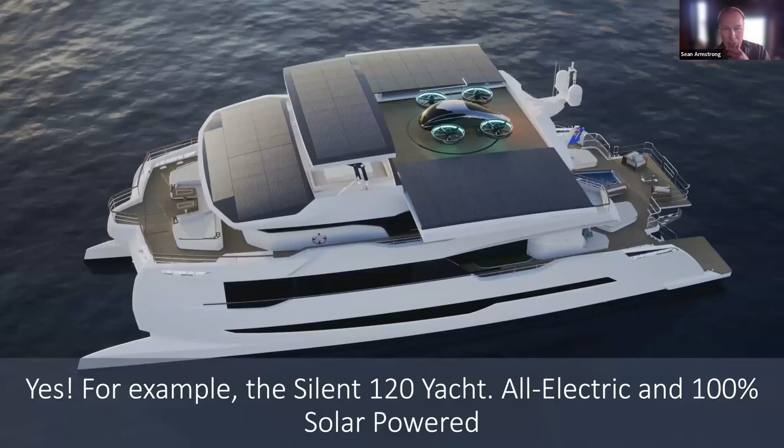PG&E is the number one problem for all of our developments. As he says that, his vice president says that - everyone's like, this is totally real. And so my response is like, yeah, we totally can.

This has been going on for quite a while - not only that house I had, the funky house on campus, but for quite a while they've been floating around in these off-grid boats. It's also houseboats like in Europe, the Netherlands, in the canals and such.

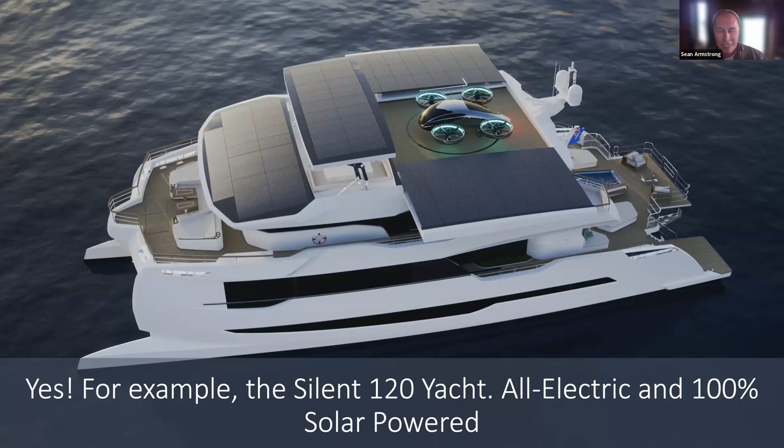So this is a 120-foot long yacht. It's got the outdoor hot tub and movie screens. It comes with jet skis, comes with a submarine. That little airplane you saw there, that's just photoshopped in, but they say next year they're going to have an artificial intelligence, super awesome little self-flying small airplane for flying into Santa Monica.

Then we also know that over in Utrecht, Netherlands, they've been taking this seriously. They banned gas in new construction in 2016, long before anyone in the United States did that - Berkeley was the first one, in 2019.

They have been going at this with how do we get all of our wind power that's coming in at different times of the day, and our solar, how do we balance that? And they said, okay, we have to put in 14,000 vehicle-to-building, vehicle-to-grid chargers in our city. They have 1,000 of them now.

These are bi-directional, so electricity can come out of the car. You can charge your car during the day with these special rates, go to these chargers - you've got 1,000 in, 14,000 to go. It's a city of like 150,000 people. So you see the ratio: 1,000 bidirectional chargers for every 10,000 residents.

So these batteries are huge. Batteries in the United States right now - there's 80 times more batteries on wheels than there are attached to people's homes, like Powerwalls and LG Chem. 80 times more. And there's 4 to 5 times more batteries on wheels than there are grid-supporting batteries, those big fields of batteries next to whatever.

So the batteries in vehicles are the batteries of the United States. You can add all the other batteries in there and you haven't got half as much battery as there is on wheels right now. And that's true throughout the world.

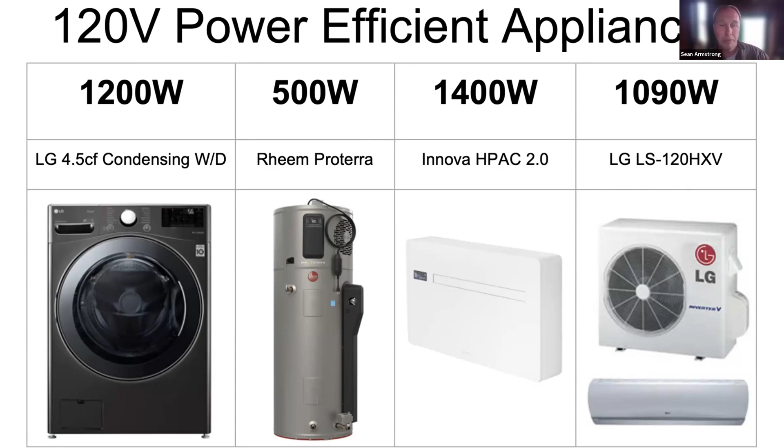That's not for your home retrofit, but you should just know this. Mitrex, a company out of Canada, they've been making siding forever, and now they're making solar panel siding. Great stuff, it's all UL listed, fire rated, everything about it's done.

Batteries, hot topic. I mentioned earlier how much more battery there is on wheels than there is on buildings - it's an 80-to-1 ratio. Well, it shows up in pricing. If you're going to get 7.5 Tesla Powerwalls, that price of $130,000 installed - keep in mind it's maybe $70,000 to $80,000 of battery you purchased, but you have to install it, and it's expensive to install these things, versus factory installed batteries on wheels.

And so this Ford F-150 Lightning, it comes automatically with a 7.2, which is what an electric resistance dryer uses - 30 amps at 240 volts. It comes with a lot of power. It comes with a 240 volt generator that you can essentially plug into your house now, in PG&E territory. They've approved it - there's a little collar for it, but you can plug it in. There's a lot of products that would manage this, not just PG&E's little collar.

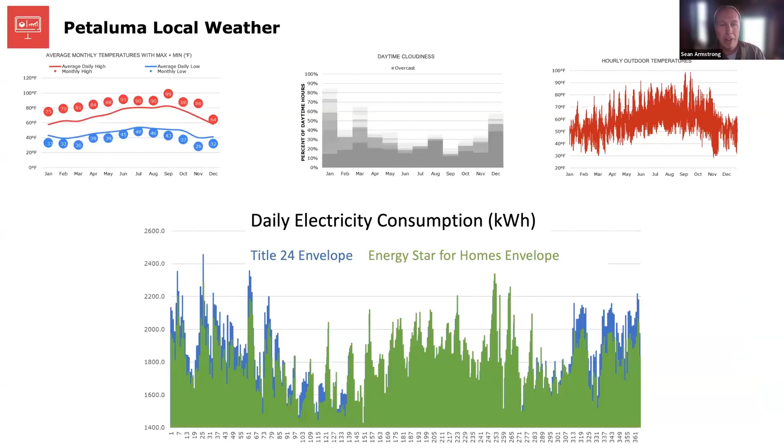So how this is going to work out, how this is working out globally as a phenomenon - not just in California, not just on the East Coast or in Europe - is that people, in this case tenants, with vehicle to building or vehicle to grid electric vehicles, will be offered free charging or low-cost charging - in our case free charging during daylight hours when the project's solar panels are producing more than the system can handle, it might otherwise just go into the dirt if we couldn't put it into vehicles. In return, for small amounts of power leading up to and during prolonged bad weather, we'll charge our big battery in the project off these little batteries - a little bit from each vehicle, maybe 15 miles of driving worth. That's what I mean by a little bit, like taking a little drive to the grocery store.

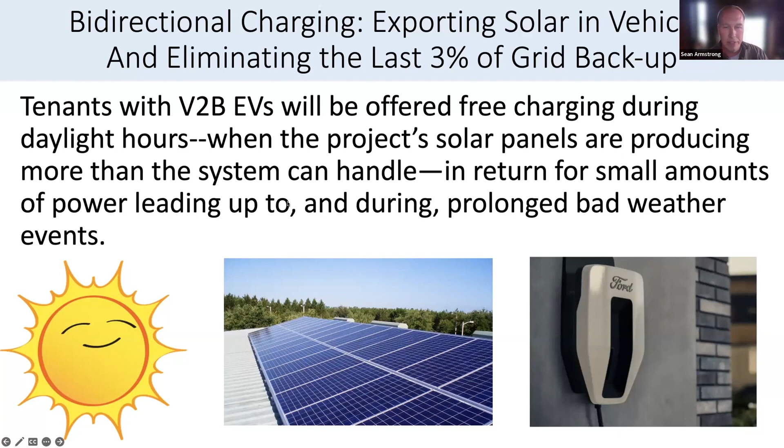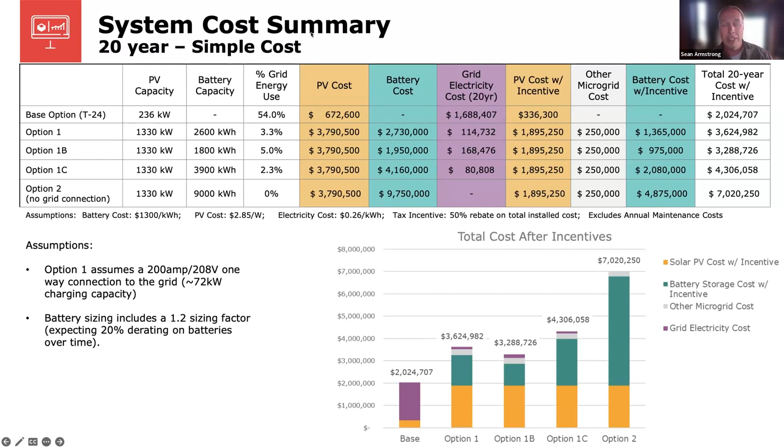The last slide here shows you our strategies. There's the base strategy of just a little bit of solar and then a bunch of purple grid electricity. Then we have three different options where we're getting about 2 to 5% of our electricity from the grid or from vehicles - that's our either-or option. Maybe we get 5% of all the electricity we need in the year, almost all of it just in the wintertime, from vehicles contributing in. And this is not futuristic - as I said, this is already happening everywhere. It's been happening since 2011, since the Fukushima earthquakes, that disaster over in Japan.

So that's the end of that presentation. If anyone has any questions just about that for a moment - that's sort of the neatest, most advanced thing I'm doing to try to show how to get around having to hook up with PG&E, which delays our construction so much that affordable housing projects can't get built now. Literally in Petaluma, they were denied building permits because PG&E just couldn't handle the problem of trying to get these things hooked up.

Now Tim, you ask: can I convert an oil burning boiler, hot water baseboard heating system to an electric system utilizing the latest heat pumps?

To baseboard heating system is your question - okay, yes you can, but can we replace your baseboard heaters with something efficient, please? So I'm going to share my screen here just for kicks, I wanted to show you that. I'm going to quickly show you an answer to one of the questions, then we'll go back into the case studies, the next part where I keep talking. Jaga - they make heat pump friendly baseboard heaters, they're called efficient convectors. So I'm going to click on the efficient convectors.

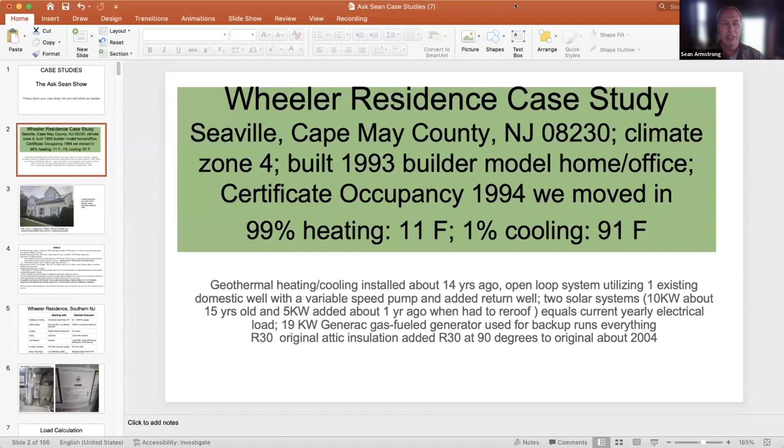All right, let's talk about the Wheeler house. It's in Seaville, Cape May County, New Jersey, climate zone 4. It's a 1993 house, we just moved in. That's nice, so 1% cooling. Now they have a geothermal heat pump that went in about 14 years ago. They've got solar electric, great, so it's making their electricity very low cost.

So if they're electrifying additional things, terrific, low cost electricity. Now they've got a 19 kW Generac gas fuel generator used for backup that runs everything.

Now, let us recall the presentation I just gave you, which is grant funded, tons of us researchers—this is a Noah's Ark of researchers. We're all working on the question together. I just gave you what I think is the most energy efficient, resilient, low cost battery way of doing things.

So when I look at this 19 kW Generac gas fueled generator, I said, well, the Ford F-150 Lightning runs 19.2 kW through its inverter. So you could have a Ford, which has 7.5 Tesla Powerwalls in it, and that would also be half as expensive as installing those Tesla Powerwalls. That was like $63,000 or $67,000.

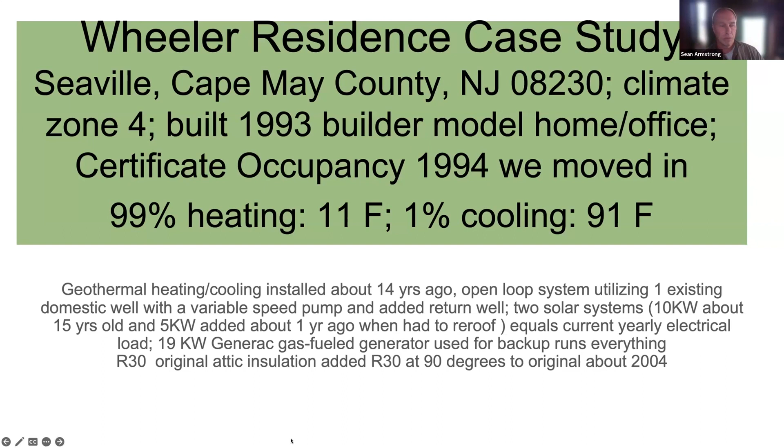So here's the house, that's a nice house. It's got solar panels on the roof, and we know it's got a ground source heat pump. So we talked before about how the F-150 Lightning—now it has a gas water heater in the basement.

Now, the water heater that I showed you, that 500-watt water heater, that generally is what I would recommend. But because the basement could get too cold, getting one of those same heat pump water heaters that has some electric resistance backup, that'd probably be good.

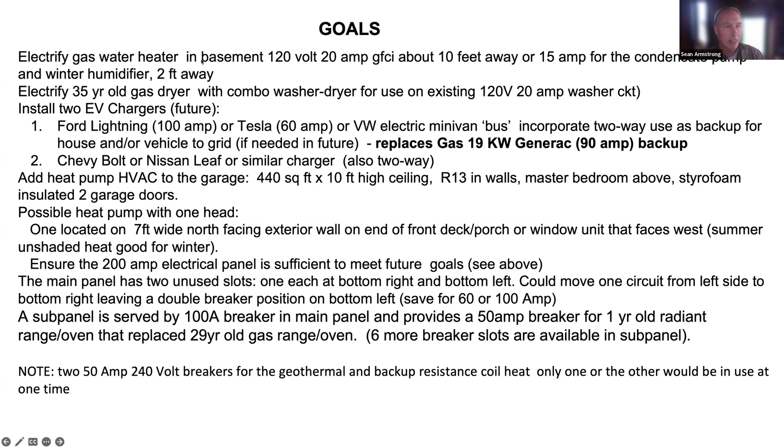Let me show everybody just for a moment—I'm going to back out of this slide. So let's talk about water heaters for just a second. There's a resource that I'm going to get, because this is all going by pretty fast, I know. And I'm going to just walk you through the resource instead of blowing your mind so quickly.

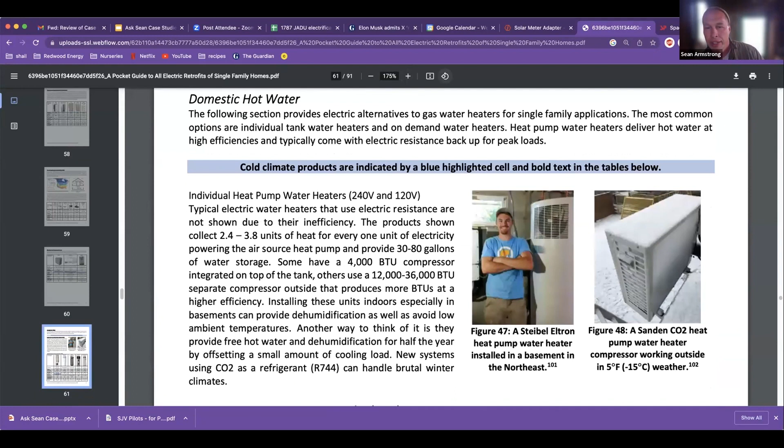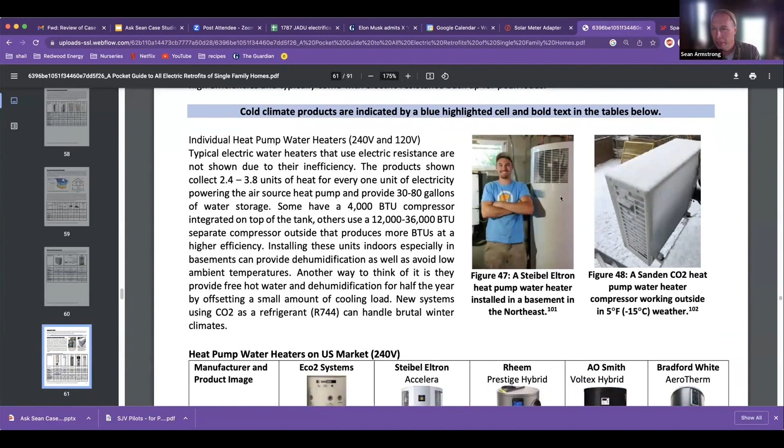If you just hit domestic hot water, it brings you to the domestic hot water heat pump page, and it's showing, like, if you have an outside situation, you can use the Sanden CO2. If you have an inside situation, if it's still warm enough in the winter, you can run just a heat pump inside. And here's these products.

That's what's nice about this booklet. It's like, oh, Stiebel Eltron, that's made in Vermont. It's the highest end of all of them, and it's been going since 1985. They've been making them the longest in our country. But you pay a premium of like $1,000.

Rheem, kind of the cheapest. They're a little bit louder at 55 decibels. A.O. Smith, they're offering a 45 decibel product. So the way you experience that is it's half as loud.

The way it comes out in cost is that the Rheem, if you're going to put it in your closet, in the house, which is a great place to put a heat pump water heater, you need to have it on an anti-vibration pad, and put insulation inside that closet and a vented door, perhaps. It's got a little louver on the top and a little quarter-inch cut underneath so it can get some air moving through it. But you need to acoustically isolate it versus the A.O. Smith, the much quieter one. You don't have to do so much work, you don't have to worry about that.

And Bradford White, which is essentially more like the Rheem, it's sort of like lower cost and has a little bit less invested in its quietness.

Oh, and the last one to think about is, what if you're the kind of person who has a gigantic rain shower? That's fine, those water heaters can all handle like the 2.5, 3.5 gallon per minute rain showers, the huge waterfall experience.

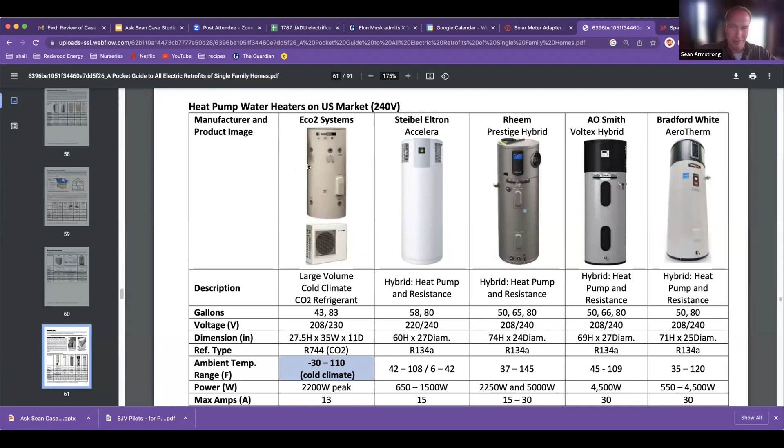But it also has a better refrigerant. These refrigerants all boil at around -35 Fahrenheit. This one boils at -110, pardon me, so it can absorb way more heat even on a super cold day. At -30, no worries. So this one also produces 4 times as much hot water, and it does it at crazy low temperatures.

So these are kind of your options, basically, in the United States. The brands every year come up with a new long number and symbol, but that's what you got.

And all these ones can go inside, and if they're inside in a warm place, you don't need electric resistance backup at all. You can use that one I was showing you, the 500 watts, 120 volt, plugs in anywhere, easy peasy.

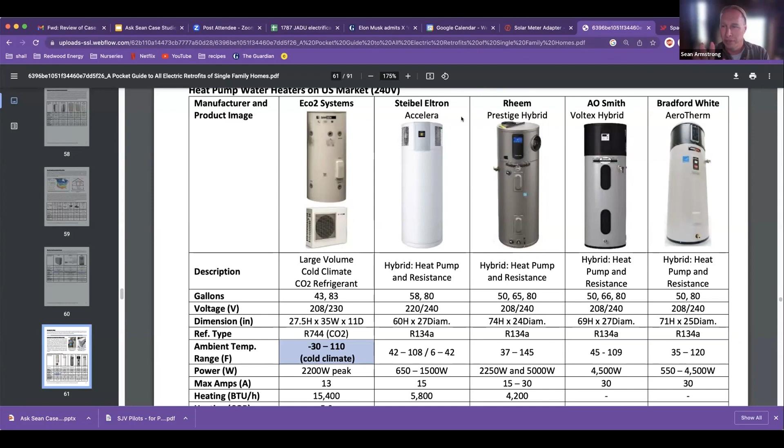But if you're putting it into a basement, you might want to have an electric resistance element backup, which turns it into 240 volts. In an unconditioned basement, like ones that already kind of freeze, if it's close to 40 degrees Fahrenheit and it's only the water heater keeping the basement warm, this is going to be a water heater that keeps the basement cold and dries it out so it doesn't have as much mildew and wetness. It's a dehumidifier also.

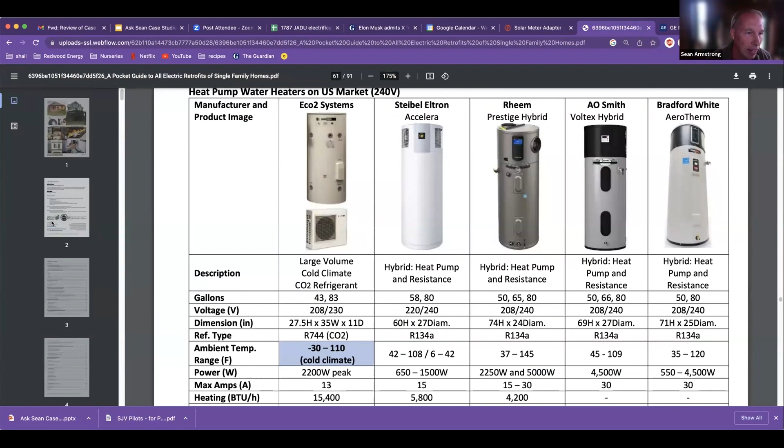Now, going back to the guide, I'm just going to show you that. Let's see here.

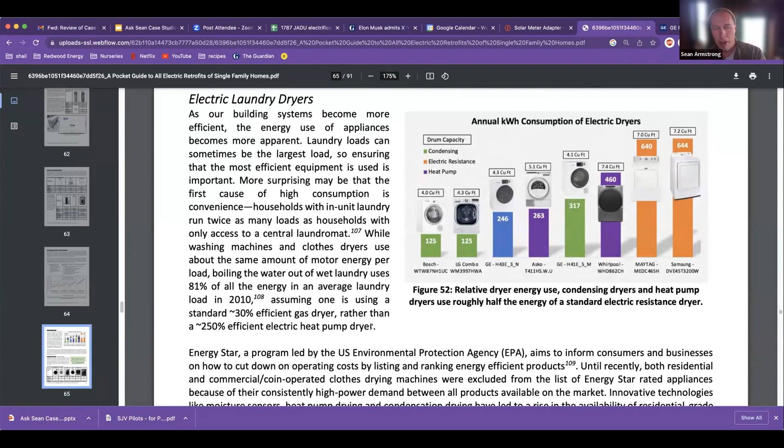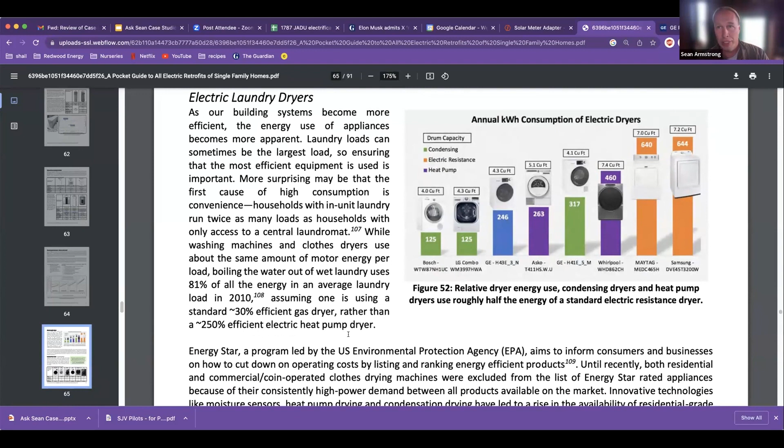Laundry dryers. Okay, I was showing you before how electric resistance, here in orange, uses a lot more energy. Now you can see there's heat pumps in the middle. There's even condensing washer dryers and heat pumps at the very bottom, but the very lowest consuming are small loads. That's the trick—if you can get a washing and drying machine that has a smaller amount of air that it heats up, that is the most efficient, just so you know.

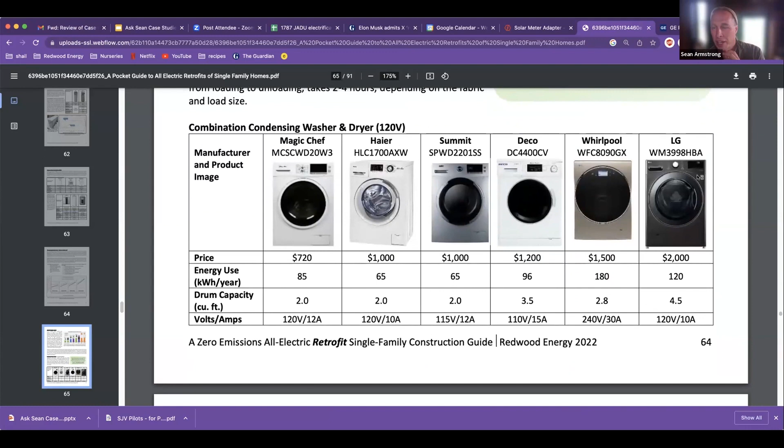There's a lot of energy that's wasted in big loads. These are combination condensing washer dryers out there. LG has the best, and it's the one that I have currently. I'd like to get that GE I just showed you. Here are single purpose heat pump dryers that use half to one-third as much.

They come in different capacities. Just note that Kenmore and Whirlpool have the 7.4 cubic capacity, so those are going to use more energy because they have more capacity. But if you're a person who launders dog bedding or something, then maybe you need a big one.

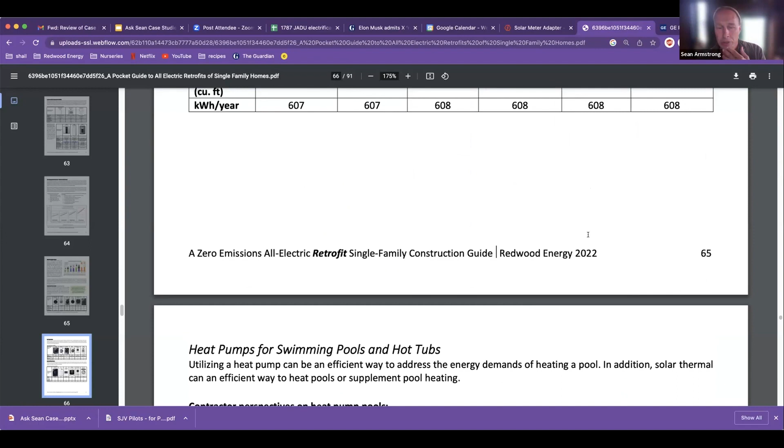And then there are standard electric resistance dryers that are 240 volt, you guys all know about those. And there are a few that are 120 volt that just are not efficient and take a long time, but some people just need that because they're cheap. They're like $300, $400 dryers, $600 for a really big one.

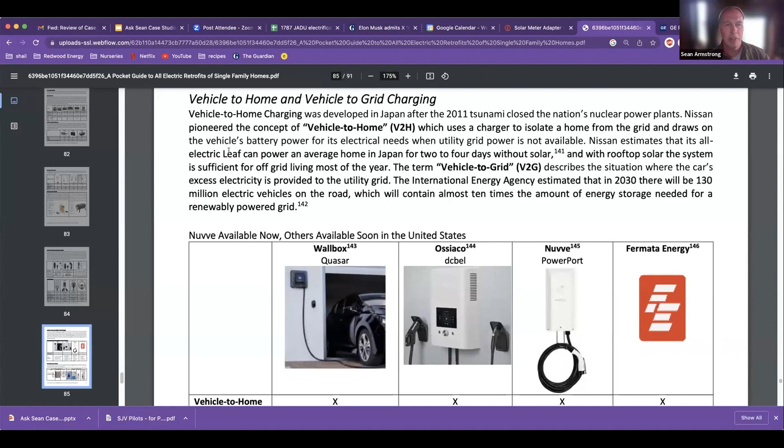Here we go, stop share, new share. And so here in the booklet, it gives you a conversation about vehicle to home and vehicle to grid charging. So these are neat - Wallbox, Ossiaco, which has the dcbel. They're all into music, so Ossiaco is a musical term. Decibel, obviously, they have other things. If you go to their website, they're just really into music.

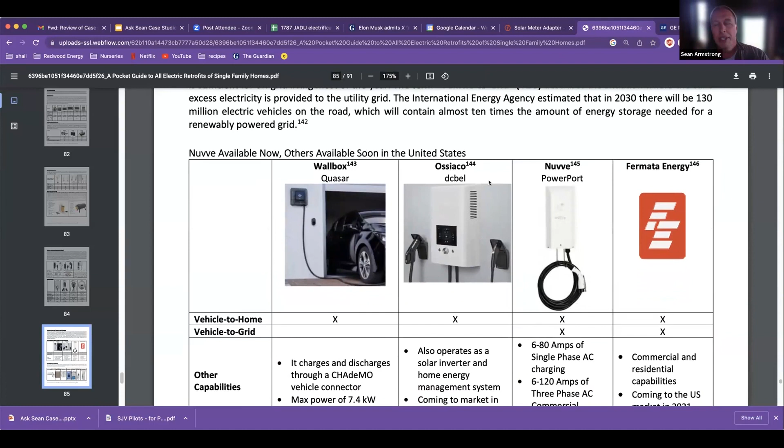Nuvve is doing this right now - Nuvve is partnered with Wallbox for the home version, and Nuvve has in the United States ones for school buses, because they're turning schools into resiliency hubs. So the school buses can power the school during a blizzard, power the school post-earthquake, post-tornado, post-wildfire, name your disaster. Fermata is all over Eurasia and keeps teasing us saying they're going to bring something to the United States. But Wallbox, Ossiaco, and Nuvve are here.

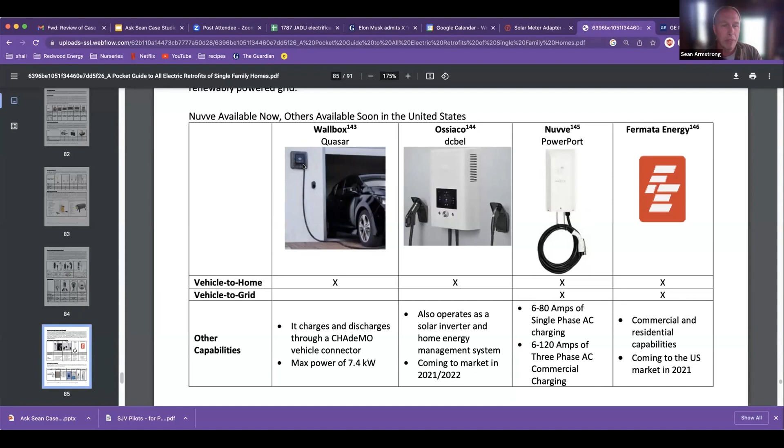And Enphase, which is our nation's largest solar inverter manufacturer, they are making one that coordinates with their specific Enphase microinverters - the small ones that go on the back of the panels, which are essentially the dominant way that inverting solar panels is done in the United States. Not the only way, but they're coming out with one as well. Now, these are ones on the other side of the oceans, just so you know.

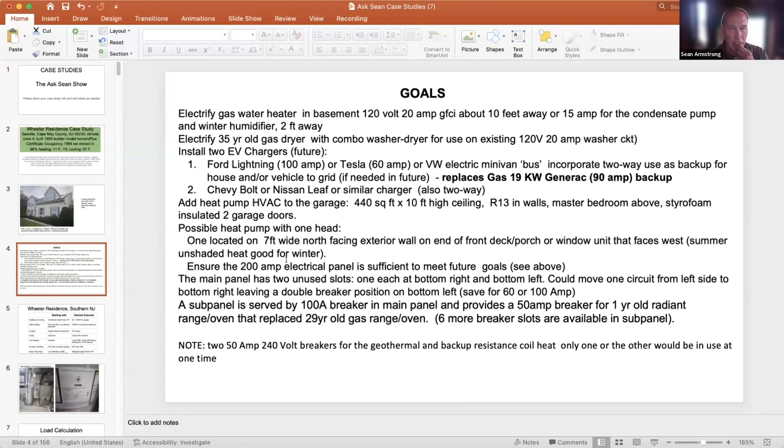Okay, so now back to our question. Oh, this is nicely organized here. We'll just work on this going forward.

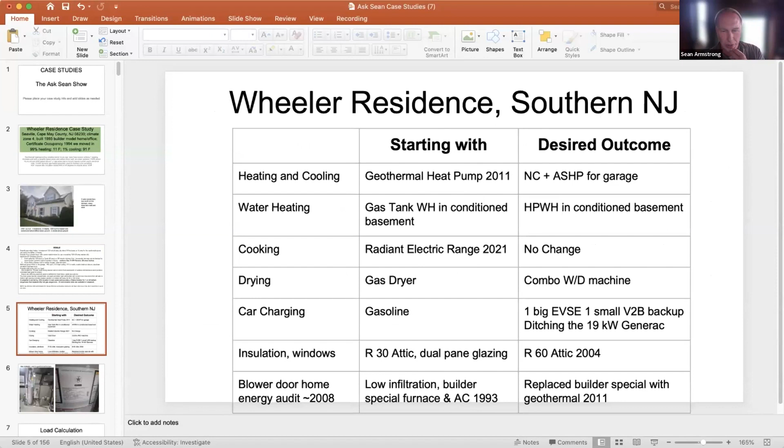So the heating and cooling, desired outcome, and an air source heat pump for the garage. What does NC stand for? Tom, did you take down that notation? Yep, so that was no change - just leave the geothermal as it is. So you couldn't just write out no change, huh? You had to make a new abbreviation. Yep, okay.

So, and plus the air source heat pump for the garage, can you weigh in on that one? Are you talking about adding a new air source heat pump? Is that what I was understanding there? Yes. Okay, so air source heat pump for the garage.

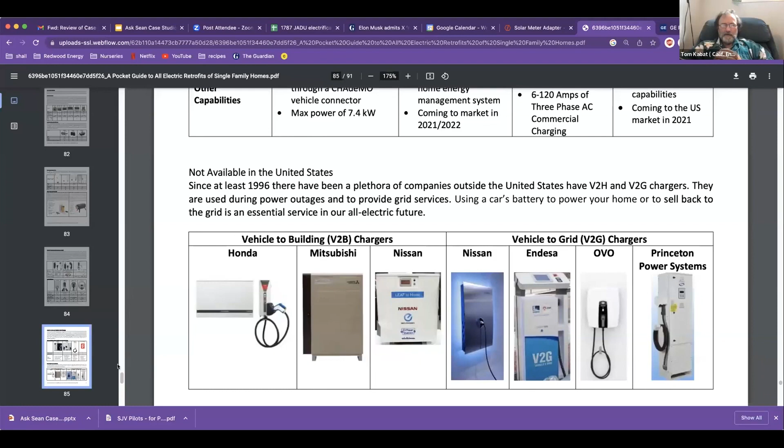Let's go stop share, new share, going back to the little booklet. And so in the case studies, the two case studies we're looking at tonight, they both have 200 amp electric panels. Oh, so we don't have to worry that much. Right, and they're both very interested in ground source heat pumps. One already has one in, the other client owns a backhoe and is ready to dig, to put his own in, and he's also an HVAC contractor and electrical contractor. So we've got some kind of unique guests on the show tonight.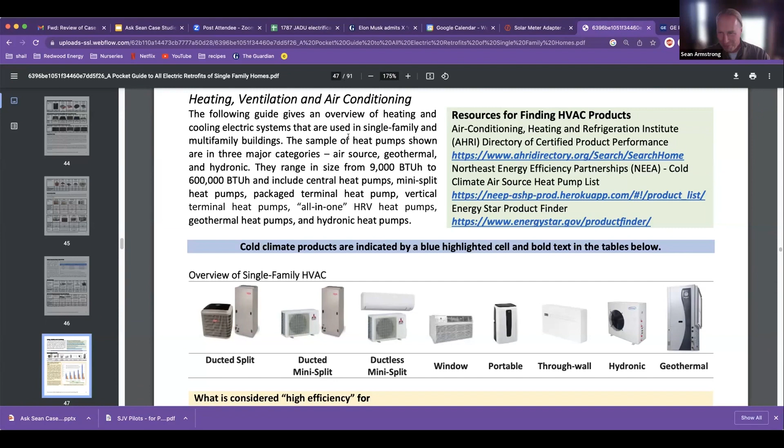Cool, cool. Okay, so for all y'all, there are a lot of options on HVAC. Geothermal on the far right-hand side, we're going to focus here. But hydronic, we talked about that as I want to answer one of the questions live there. This is Chiltrix, and this is a smaller system, like a 2-ton system for a smaller hydronic house that has the right radiators or has a hydronic floor. But this Chiltrix and SpacePak, they don't work with baseboard heaters or those old-fashioned radiators. You need to have new efficient radiators.

Okay, through wall systems - everyone has those crummy air conditioners that are in the window. This is a fancy version, but we're using them in all of our apartments because they're under $4,000 per room, and using a ductless mini split is $5,000 a room. Same pretty much as a ducted system, which might be closer to $6,000 per room. So portable and windows, there's just not a whole lot of good products yet to talk about - I'm working hard on that with manufacturers. And then ducted systems, this is kind of a classic old school - there's an air conditioner that's outside now.

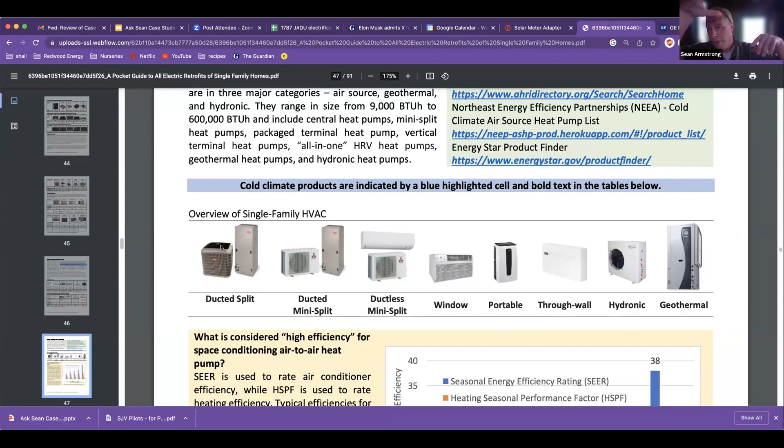You take that air conditioner out, you put a heat pump that looks the same, and just go up to where the air conditioner is and stick in the heat pump version. Now you're heating and cooling.

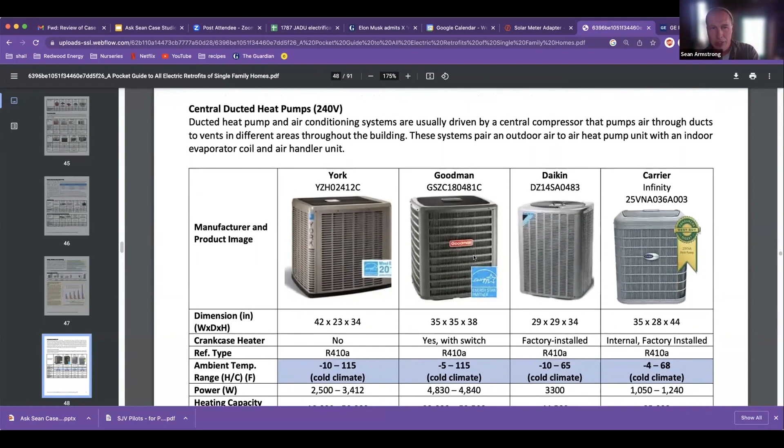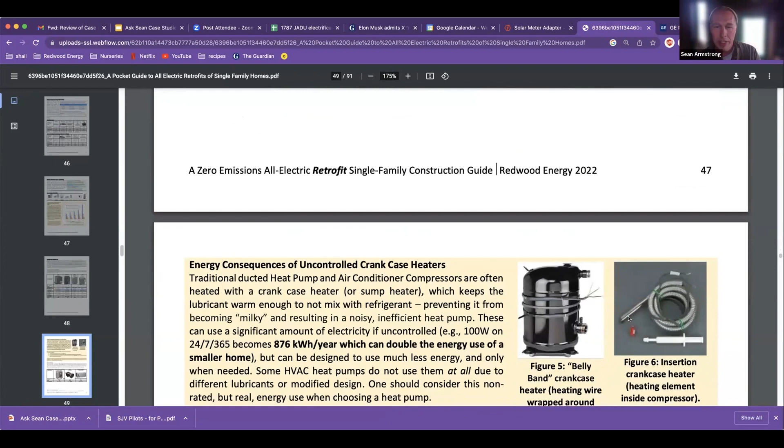Okay, but let's go to geothermal. So this is the classic style central ducted heat pumps. If you're doing one, I'll just mention Carrier is excellent with its cold climate products these days, high efficiency, United States made. I'm gonna skip that for a sec.

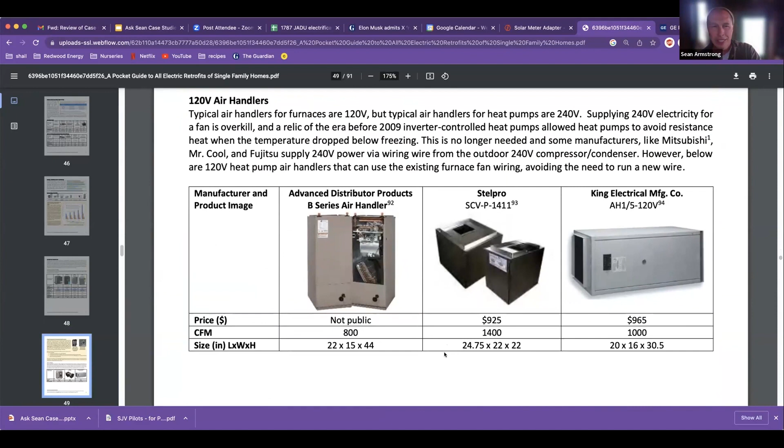120 volt air handlers—if it's just a hassle to run 240 volt up to where you have an air handler, it's nice to know that there are 120 volt ones that just plug into any old outlet, any old circuit around there. So mini splits, here's some pricing.

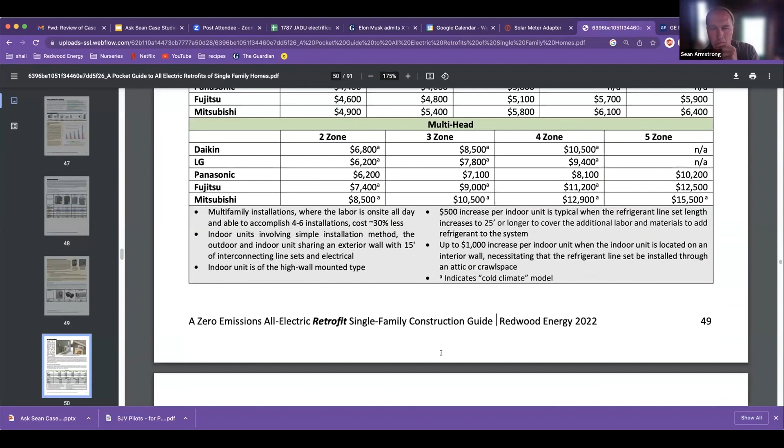Going past that, because I'm getting to the ground source. These are ductless mini splits, and these are the ones that go terrific for super cold environments, -30, that kind of stuff. You can get here like Haier. And I would generally push people towards an air source heat pump for lowering cost.

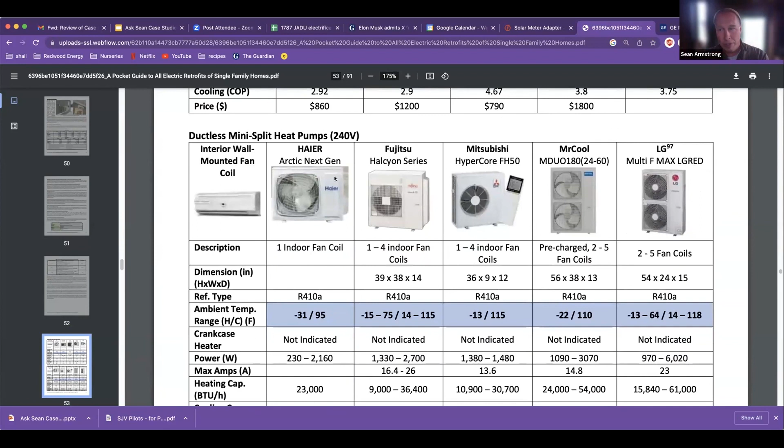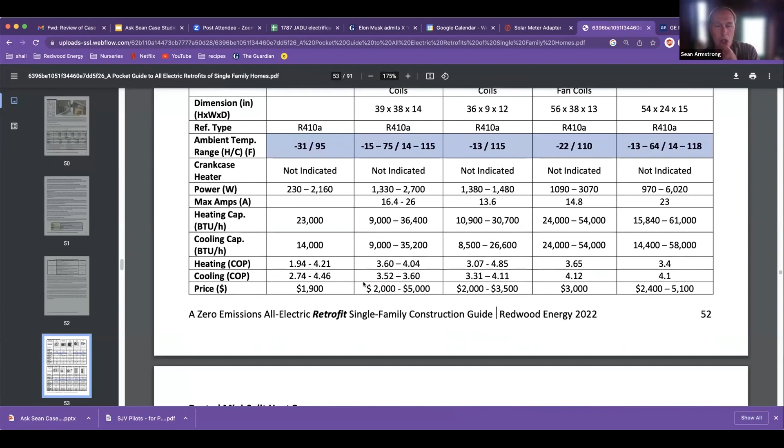These folks have ground source heat pumps, bless their hearts. But for new construction or people on budgets, generally it's lower cost to get an air source heat pump if you're just starting out from scratch, until you get into central Canada. And ground source heat pumps are generally also restricted to like 130 Fahrenheit water. So you don't really get away from that problem of needing to do new radiators, or just do a different type of heating system like a ductless mini split or a ducted system—radiators are old-fashioned. They're designed for burning coal originally, and then burning gas at temperatures that coal also burned at.

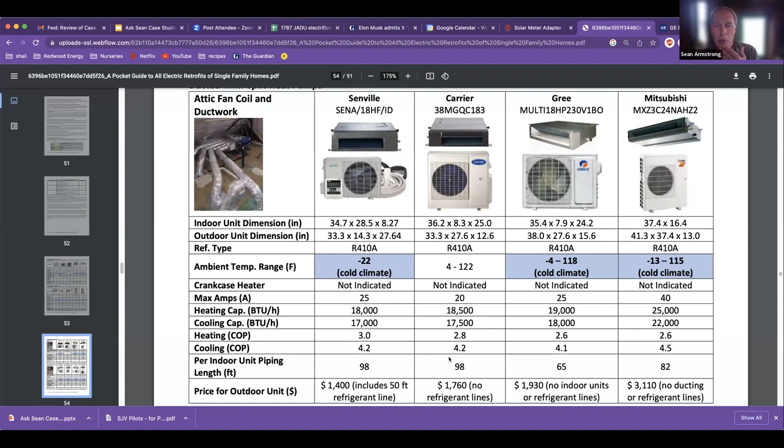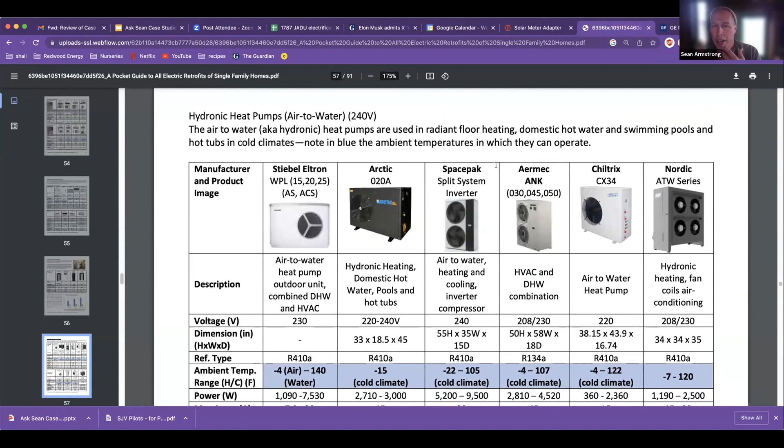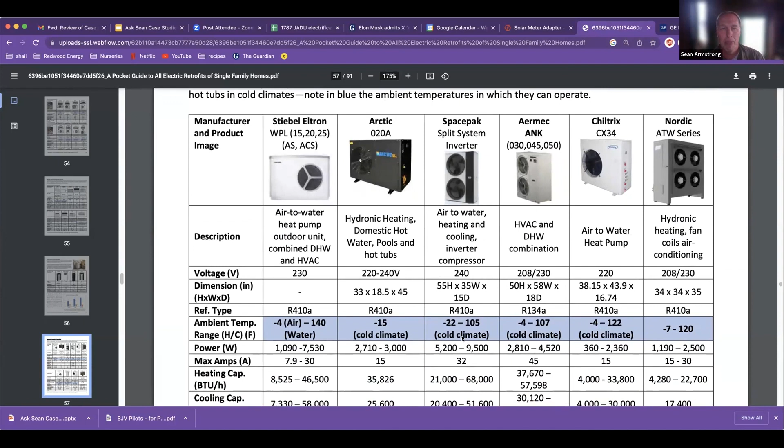But okay, moving away from those products—portables, these are the hydronic choices. Just to refresh you all, I showed you Spacepak, but Arctic has been tested out in upstate New York as being the most reliable at the coldest temperatures like upstate New York needs. It's out of Canada. Stiebel Eltron, another great company, Aermec, Chiltrix, Nordic. I personally can stand behind Arctic, Spacepak, and Chiltrix as products that I know about that are strong.

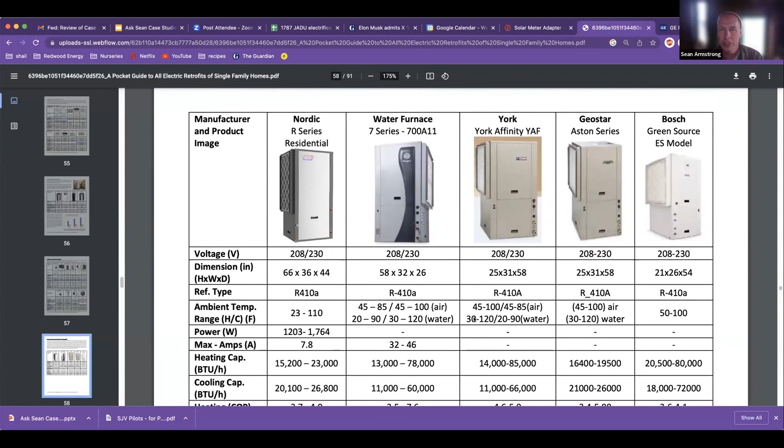Ground source heat pumps, okay. They're also called geothermal, and they're also called geo exchange. Water Furnace is kind of the big deal company. And these other products—Nordic, York. Nordic is a big brand. York is a big brand. Geostar I know less about. Bosch, enormous global brand—not a coincidence, Bosch, out of Germany.

Because as you get into Germany latitudes, which is more like central Canada latitudes, when you just get up that far, it can get some really extreme cold temperatures in the wintertime. And before we had computers in heat pumps, which starts only in 2009 and has just gotten into heat pumps in a more standardized way in the last 3 to 4 years—it's true much more so in the rest of the world that people are using computers. The United States just had very low efficiency standards since like 1981. We've always had super low efficiency standards compared to everywhere else. We just haven't had rapid acceleration of the use of computers.

So ground source heat pumps, which always accessed very warm ground, made sense in climates like New Jersey until, I don't know, 2013, 2014, when there became significant market penetration of computers into air source heat pumps. And once you have a computer in it, then it allows the heat pump to go to like -30 Fahrenheit, depending upon the product.

Now I'm going to pause here—do either of you have questions you want to chat about ground source heat pumps? The two of you that are your case study examples? Because you hear me kind of trash talking it, but I know that they're awesome. My business partner has one. I grew up with friends who had ground source heat pumps. I'm just sort of teasingly trash talking them.

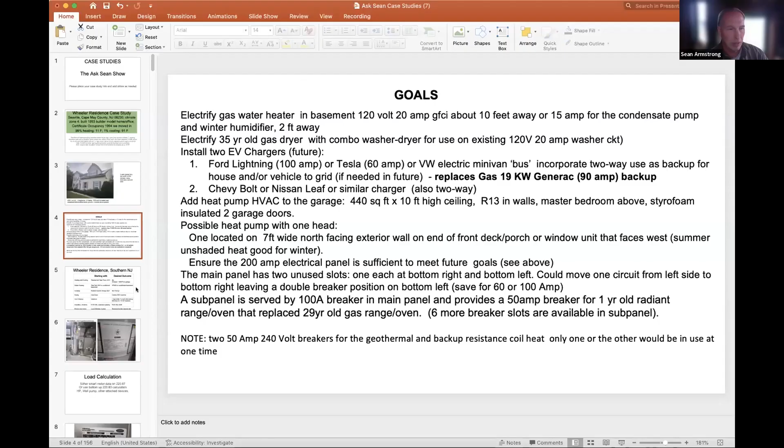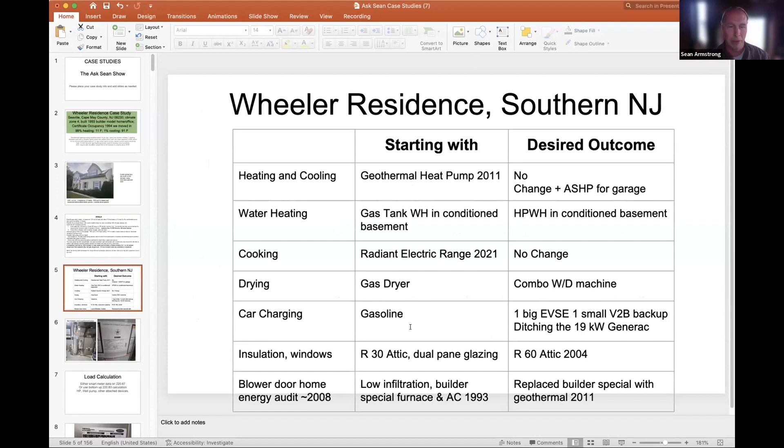Now the car charging, you want to get the electric vehicle, and we talked about ditching the 19 kW Generac and getting a truck. You'd need a Ford to get 19 kW, you wouldn't get that out of a car necessarily, unless you just need more and more battery. The cars are usually 60 kWh batteries, and the Ford is 100 to 130 kilowatt hours. It's just designed for supplying more power.

Now here's your water heater next to your ground source heat pump downstairs, right? We talked about that being probably a good place. It doesn't know what it is - it came with two labels, a Carrier label and a Bryant. You put one on and it says Bryant.

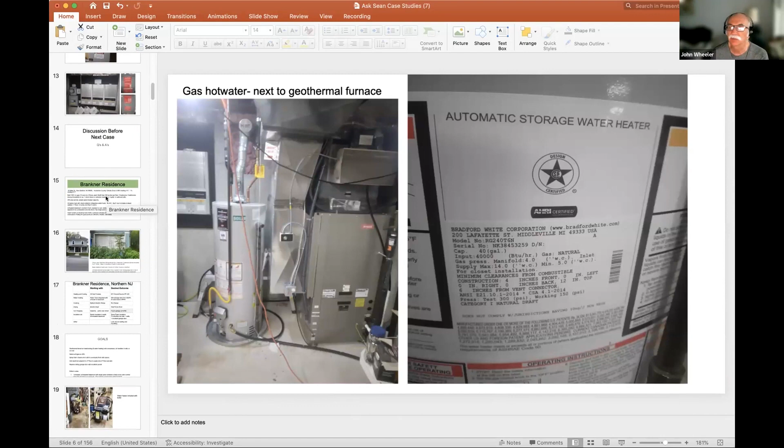So do you have any other questions before I move on to the next case study? Things you want to chat about? I don't believe so, thank you. Oh, no problem, this is always fun.

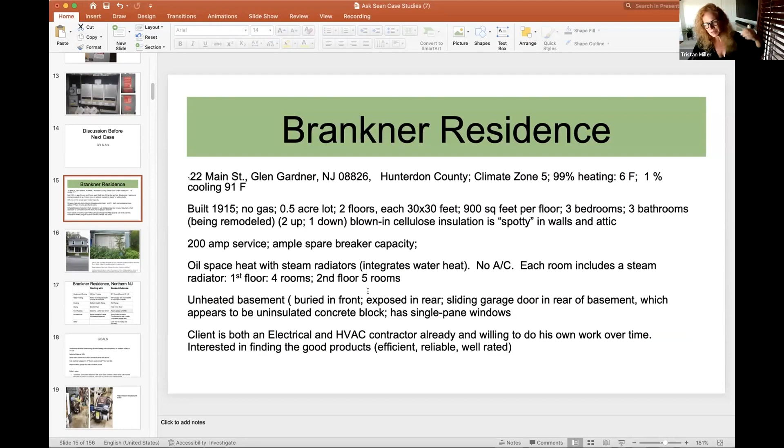John had talked about the ease with which he's able to create the water source. John, can you tell us about that? You had a well, you just reused it. Yeah, right, I'm on well and septic here, so we already had the well for the supply, and it's an open loop system, which means you pull it out of one well and dump it into a second well. So we had to have a second well installed at the time. I've forgotten how much that cost.

In the existing well, they replaced a standard well pump with a variable speed Grundfos, and that's been in there for all those years. Did have to replace the automatic speed control on it a few years ago because that went bad, but so far, knock on wood, the pump in the ground is good, but the controller, which didn't have to go into the ground to replace, that's sitting in the basement, did die on us.

Well, that's good. The variable speed stuff, which has come on with better computers and circuits, that is the real efficiency gain, because when you have a single speed, it's like old-fashioned bicycles where it's just one speed. I used to ride those, but it's hard to ride up a bicycle hit like a hill. And cold weather and cold ground or warm ground, all those things are a hill. So it's nice to have variable speeds, multiple gears.

All right, cool, thanks very much Tristan, appreciate that. So our next house, the Brankner residence. Check out the house - nice old house. Blown-in insulation is spotty in the walls and attic. I love that, my blown-in foam insulation - you can see where it is and isn't depending on where the algae grows on the walls. No algae, not yet.

So the steam radiator in each room, I spoke to this earlier. This is not a problem you can solve with a ground source heat pump because they're capped at about 130 Fahrenheit. You could take 130 Fahrenheit water and put it into an electric resistance steam boiler, and those are real common - it's just a commercial product, a steam boiler. It just raises the temperature up to 160 to 180, if that's what you're trying to do - ground source, then electric resistance boost. Actually, it would be better.

Where I'm at with this whole thing is I'm just beginning. So what I'd like to do is go to some of those very efficient appliances you were just talking about - the ground source hot water heater, as well as heating and cooling. You seem to not like the geothermal, mainly because the air can be variable, but can't you get a variable geothermal? It seems to me a constant 55 degrees in the ground is nice as a source, no? You're right, the constant source is great, 55 degrees is a wonderful place to start with.

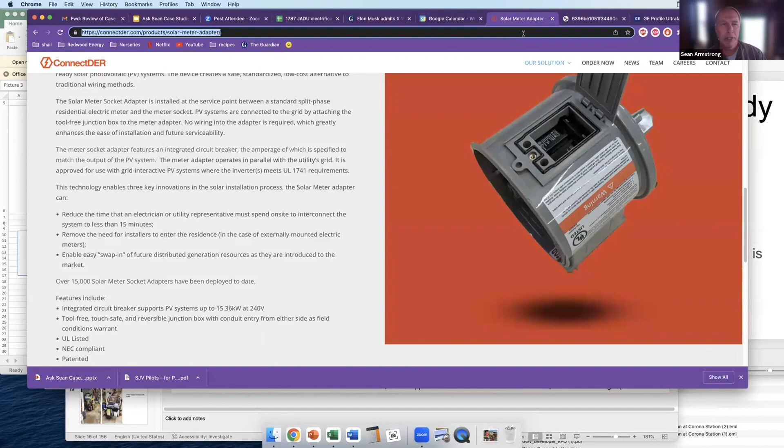So I think the steam radiators is really the thing to talk about, and those Jagas - I'll bring those back up here for us to revisit for a second. Okay, stop that share and reshare this.

Okay so Jaga, not a surprise, it's over in Europe where it's super common to have heat pumps. Not the United States - it's just working this through - but Eurasia, as an Atlantic to Pacific continent as a whole, has been moving quickly towards heat pumps, particularly since the Ukraine war started, oh boy. We got hired by a German boiler company because they were ending their manufacturing of German boilers, which they'd been doing for years, and they're ending it this year.

As you go through each one, you can find if that look has air conditioning. If it has air conditioning, it means it has a fan, because cold air falls. You just don't get air conditioning from a ground, floor-mounted device like a radiator. That doesn't work. Also, the temperature of the chilled water being sent through isn't that cold unless it has a fan to blow it, and then it's like, oh, a nice cold breeze. But it needs fans for air conditioning.

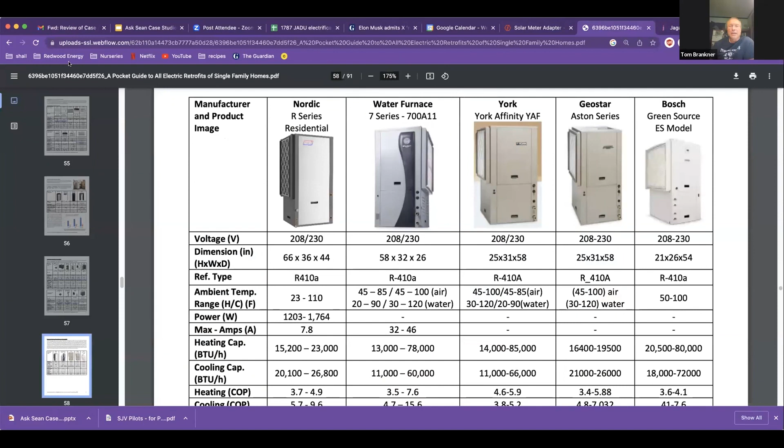It's not just having Carrier in there - there's a number of products. There's so many products we didn't put in here just because we ran out of space, more or less. It's only 91 pages long.

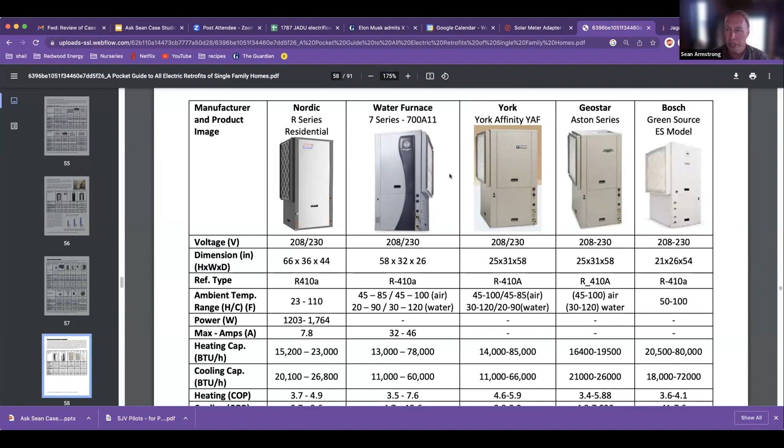I had mentioned to you that generally I'd recommend against putting a water heater attached to a ground source heat pump. I'd also recommend against people putting water heaters attached to air source heat pumps that are for the house. The reason why: these products here...

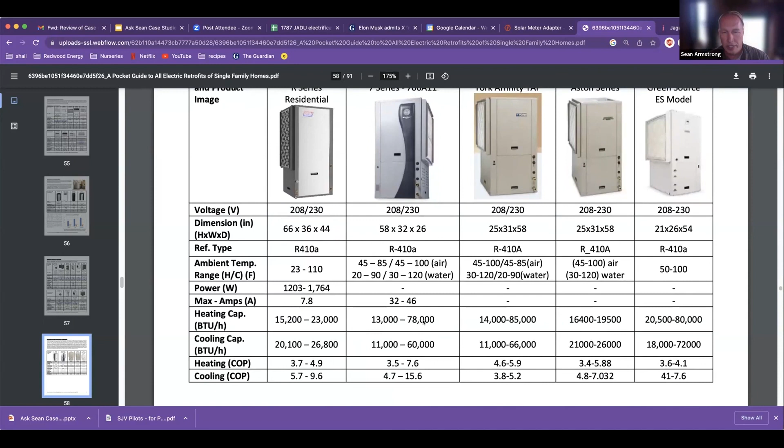They range between 13,000 and 78,000 BTUs, 14,000 to 85,000 - these are different products, just so we're clear, not one product that does that wide of a range. You only get about a 3-to-1 range from lowest to highest of any heat pump. 4-to-1 is an exceptionally good product. So this 13,000 BTU product here, its final heat pump capacity is not going to be more than about 40,000 BTUs. That's the range you're going to get.

Now, water heating is a 4,000, like a 1,000 to 4,000 BTU job. So none of these heat pumps produce hot water at the rate that a heat pump water heater generally would work, which is a 4,000 BTU heat pump. They can be less, but that's generally what they are.

So the problem is you end up running a gigantic heat pump for a little tiny load, and it's called short cycling. It's generally a bad thing for mechanical systems to be turned on and off quickly - they don't want to be turned on and off lots. They want to be left on and turned up or down, which is why the variable pumps we're talking about with John are so important.

It's just leaving things on, but varying their work is better. Pardon me. So pairing a water heater with a ground source heat pump, or an air source heat pump that's a space heating system designed for 36,000 BTUs, doesn't go with a 4,000 BTU or less load. It produces short cycling and product degradation and shortening of its life cycle, and all those things are a pain in the butt when you have a big old heat pump.

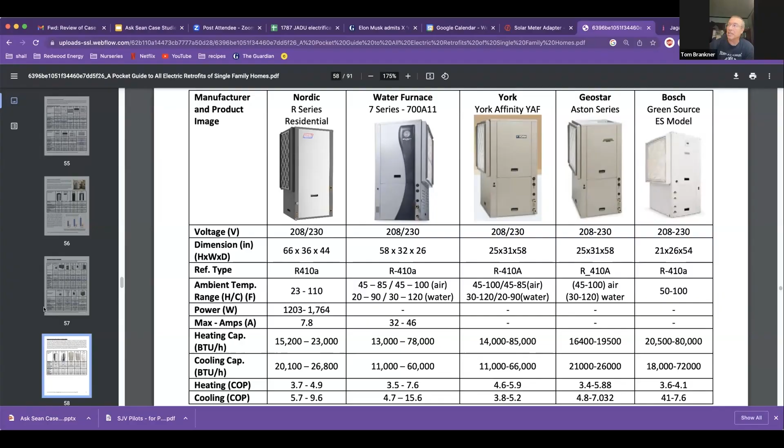Okay, so go ahead, you have a thought there? Yeah, I was just wondering - I have a big lot next to me, so I could actually put a hot water heater ground source heat pump on one line, and then dig like 3 trenches and put in the tubing for the house separate from the hot water heater.

You are correct. You're so funny. Why? You want to use that backhoe so bad. Absolutely, you know, it needs work - its name is Rocky, it needs to work.

So what you're looking for is smaller than anything I'm familiar with.

Because the ground source heat pump is generally linked to a 2-ton or 3-ton load, and the water heater is so small, it's not that it isn't a good idea - that's an efficient way to collect heat, no doubt. Go have fun. But I don't know exactly how to guide you other than to ask, are you going to be doing a recirculation, or like John Wheeler where you have a source of water you're pulling up and then dumping? Sounds like you're doing just a recirc loop, right?

Yeah, recirculation. Okay, so you're going to be using propylene glycol almost certainly, because it doesn't freeze. And then you need to find a small water source heat pump - they make these for apartments. Water source heat pumps and ground source heat pumps are the same thing, but a water source heat pump by definition works in smaller amounts as well as larger amounts. You'll just go find a 4,000 BTU or 6,000 BTU water source heat pump.

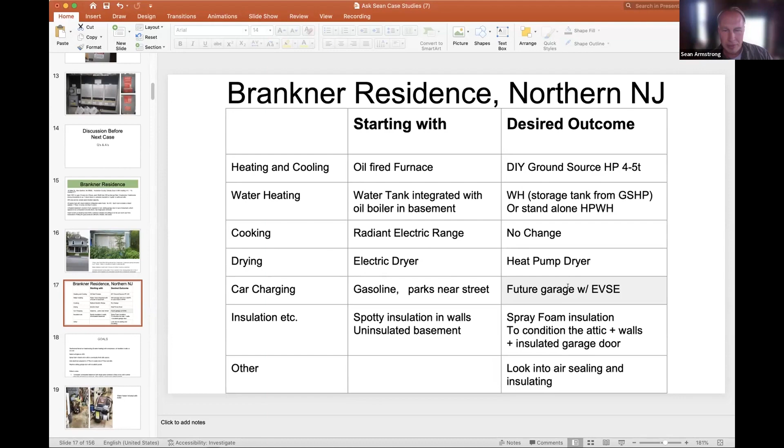More power to you. So you like your range, that's cool. I'm strongly encouraging you to at least separate your water heating system from your ground source heating system. That's a good idea. And generally, a ground source heat pump, probably with electric resistance backup, because you're going to put it in your basement. Yes. Okay, that looks like we pretty much got you done. All right, thank you.

So with that, are there some questions we should answer online, or anyone who wants to ask? You can just blurt out what you need to know. Let's see what we got - or put your question back in the chat if we did not respond to it. I think a lot of people are still asking about how to learn more about the IRA rebates, how to actually find out where to get them and access them, and some sharing that it's more next year and so on.

I have a whole bunch of IRA slides here I'm just going to bring up, okay? And I'll show you how the IRA works. I did put in the chat Steve's great link to some of the current and anticipated rebates - it's like a cool download file from his website.

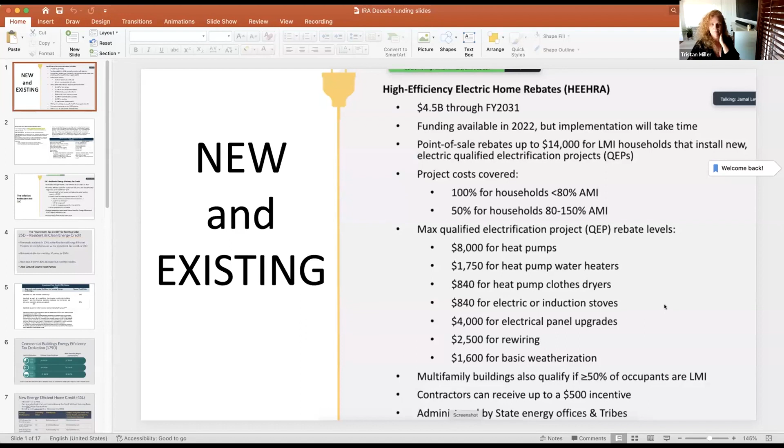Okay, so here we have the rebates you guys are talking about, the high efficiency electric home rebates, HEEHRA. Note that they are for 100% of this value here if you are below - which Jamal, you need to say that again, maybe turn off your video. Between 80% - oh sorry, I'll turn off my video, sorry. Okay, you can see that you need to be under the 80% of area median income in order to qualify for 100% of the value that you see down here.

You get half of that value if you are between 80 and 150% of the area median income. So that means if you're middle income, and lots of people are by definition, this probably captures 75% of America or so. And if you're up 25%, bless you, congratulations.

Sorry, I've got some sort of skinhead who is, hold on for just a moment. Hey, I'm giving a presentation right now. I'm sorry, sir. I'm sorry to bother you. Yeah, sorry about that. Okay, maybe it goes away now.